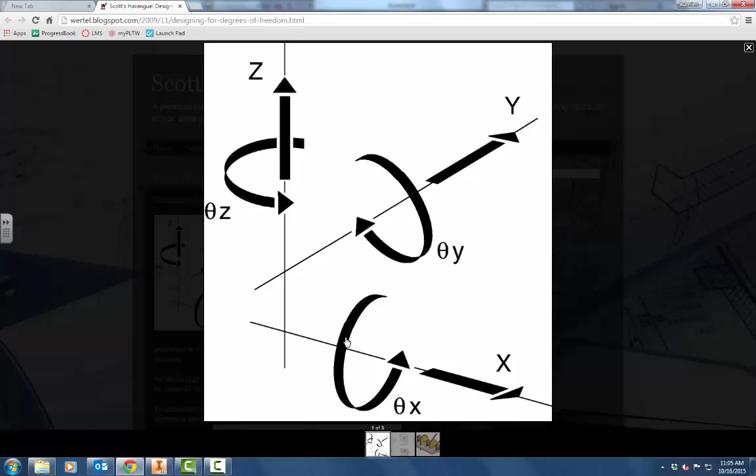Before we start making the assembly, I wanted to mention the concept of degrees of freedom. Every part placed within our graphics window has 6 degrees of freedom, meaning that piece can move along the X, Y, or Z axis, and can also rotate about the X, Y, or Z axis. As we put this together and constrain these pieces, we are trying to remove these degrees of freedom so the pieces will no longer move.

Before we do that, there's one setting I need to make sure you check whether you're on the ThinkPad or on your desktop computer. I'm going to go to Tools, Application Options, and on the Assembly tab, I need to make sure I turn on Place and Ground First Component at Origin. The reason we do that is when I bring my first piece in, I want it to snap to the origin and not move from that point, and that's going to be the reference for constraining all other pieces. Once that's done, I can hit Apply and Close.

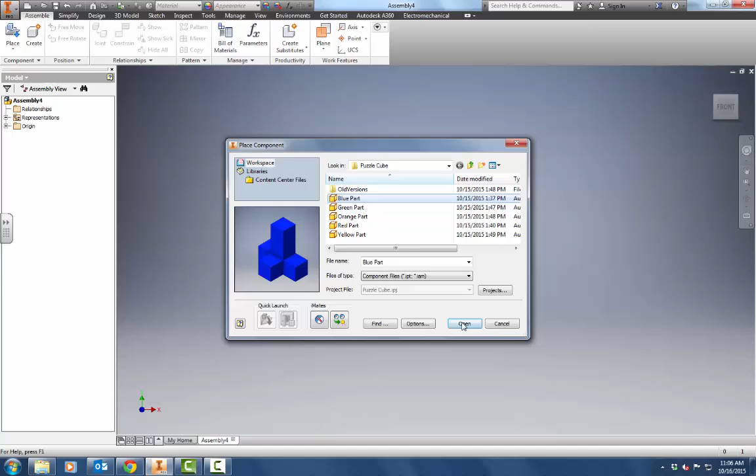I'm going to go to my Assembly tab and click Place as my starting point. I need to pick which piece is going to be my base part. In my case, I'm going to use the blue one and hit Open. It automatically places a copy at the origin, and allows me to place more copies if I want, but I don't need any more. There's only one blue piece in my design, so I'm going to right click and hit OK.

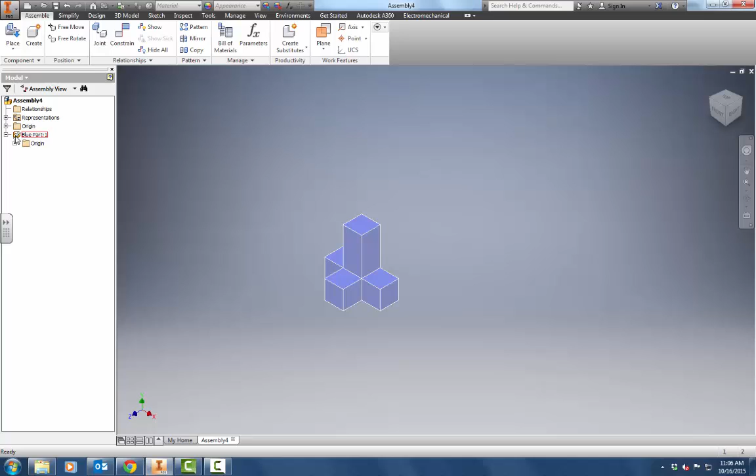Notice that this piece, when I hover over it, there's a little pin that shows up. There's also a little pin on my browser that shows this piece is grounded and will not move.

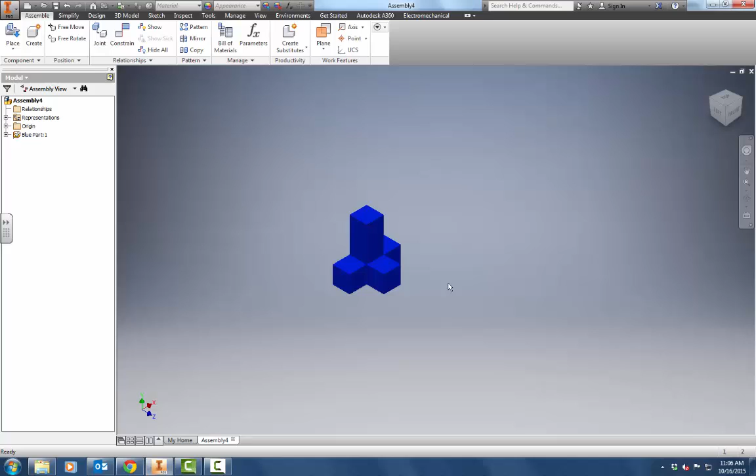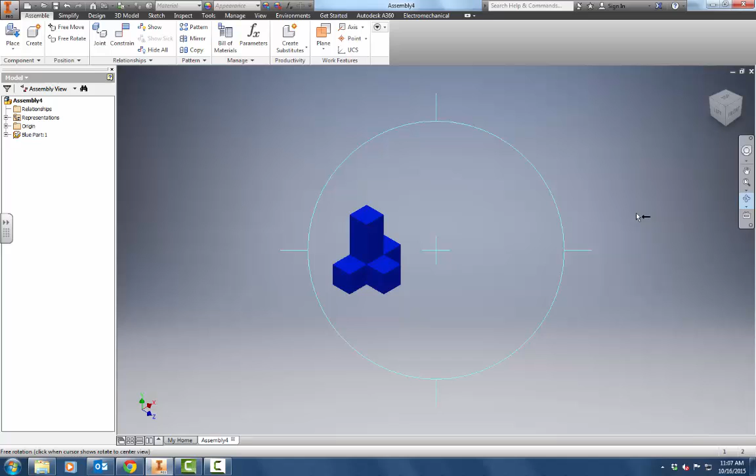The orientation of this piece, however, is not the way I designed it originally. My 4.1b graphic design template looks a little different. In fact, this piece sits more like in this orientation. So I'm going to switch my home view so this is how the home is going to look. To do that, I'm going to right click on the house, set current view as home, and fit to view. That way I can use my template as a reference as I'm putting it together, and I think you'll find that helpful as well. If I rotate this now in any direction, or orbit it, if I hit the home view, it should go back to my new home view for that part.

Next step is to click Place and select the second part. I'm going to bring the red piece in. I'm going to place it on the screen, and again I only need one copy, so I can right click and hit OK. Now this piece would actually have to rotate 180 degrees to fit to where it does with this other blue piece, and I'm going to go ahead and free rotate that to get it close to the orientation of the way it's going to be finally assembled.

So I'm using free rotate rather than free orbit, so I can just spin this one piece around. This is close enough. I know that this is going to fit here. So I'm going to use the constrain function to constrain these together. Now, we talked about removing 6 degrees of freedom. To do that, we're going to have to add 3 constraints.

All of these constraints are going to be the first type, which is a mate. Mate has two solutions. I can mate where two faces touch, or I can mate so that edges are flush with each other.

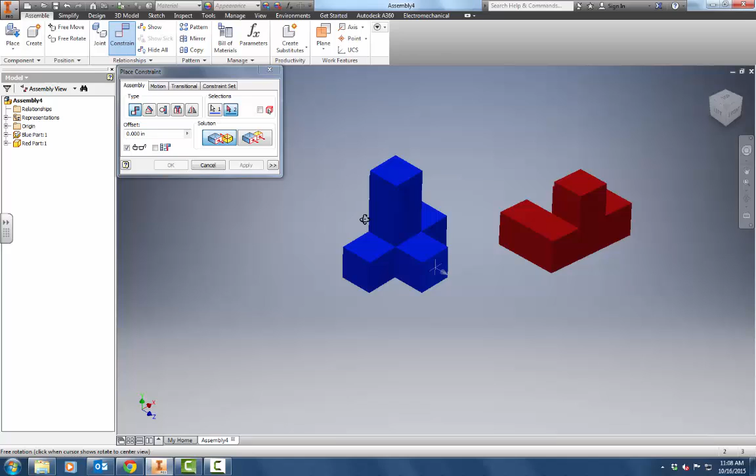For this first one, I'm going to add it so that the faces are actually touching each other. I'm going to select this surface here. If I hold down F4, that's the hotkey to free orbit. Let go of F4, then select this surface here so that these surfaces are touching each other. Once I do that, I hit Apply.

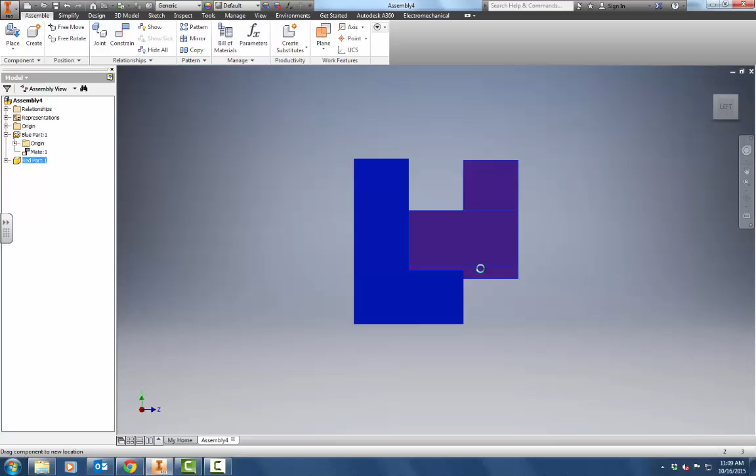I'm going to check to see what that did to my assembly. So I added one mate between those surfaces, but this red one keeps moving, and that's true because we haven't removed all degrees of freedom. But if I turn it to the left, I can see that they are now staying in line with that plane there. So one degree of freedom has been removed from this assembly.

I'm going to use constrain again to add more. This time, instead of mate, I'm going to use flush. The idea is I want to flush this surface with this surface. I hit Apply. Again, if I check...

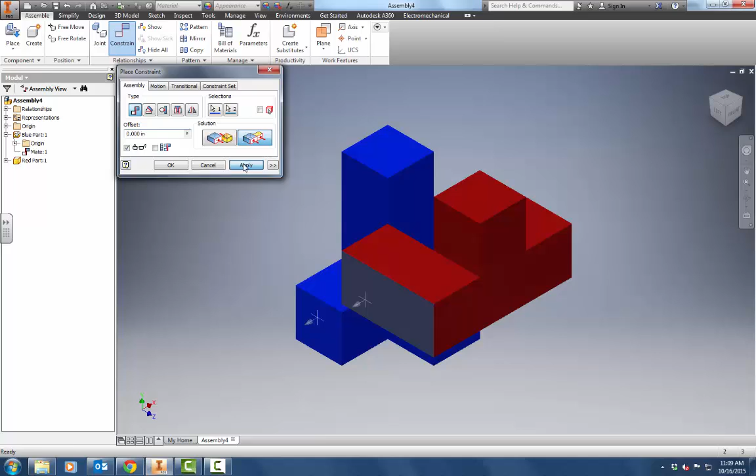This piece can still move. It's not fully constrained. I need one more constraint. We're going to do a mate with a flush solution. Select this surface and this surface, and hit apply.

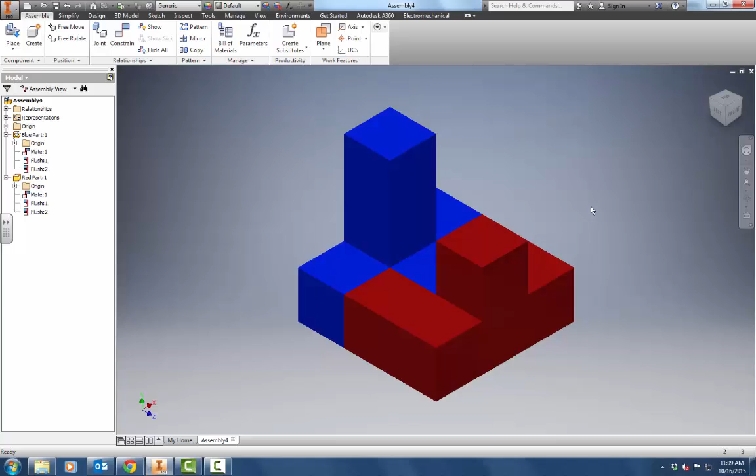So if I look in the browser now, I have three constraints on the blue and red piece. The blue one no longer moves because it's grounded to the origin, and the red one is also now fully constrained and doesn't move. I'm going to repeat this process for the other pieces as well, so I'll do one more as an example before you guys get a turn to try it out.

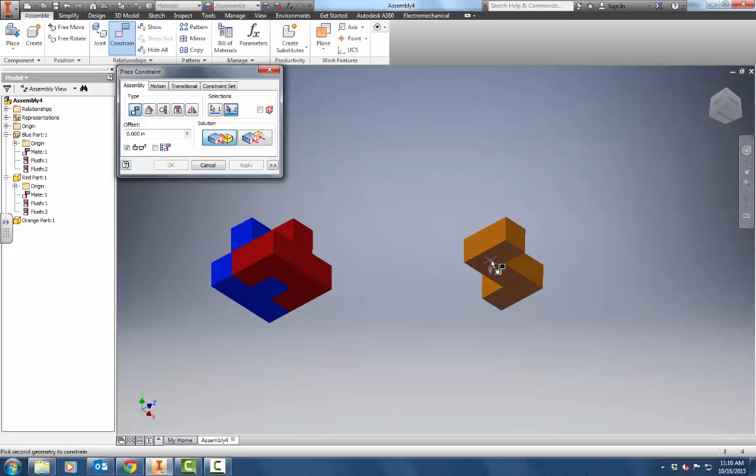I'm going to bring the orange piece in and place it on the drawing. I only need one copy, so I'll hit OK. Use constrain, and I want to constrain the bottom surface of my orange piece, so I'm using the F4 hotkey to find the bottom. I want that face to be touching the top face of my blue piece here.

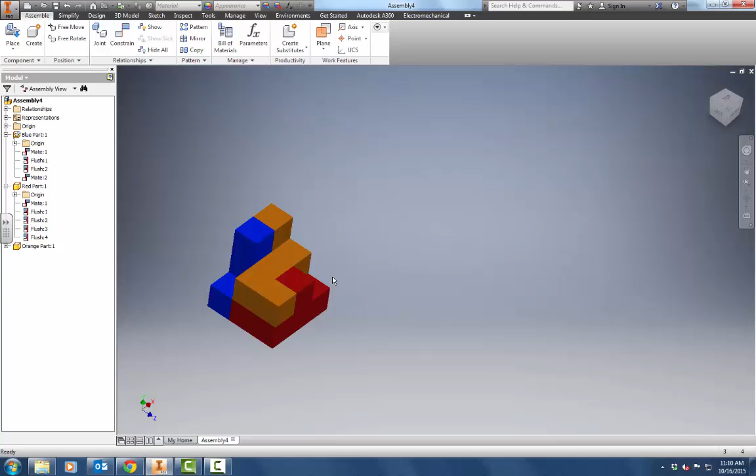Apply. I'm going to flush this edge with this edge, apply, and then flush these edges as well. Now, since these pieces share a lot of faces in common, the surfaces I picked aren't necessarily the only way I could be doing this. I could have used other surfaces to flush this and it would do the same thing.

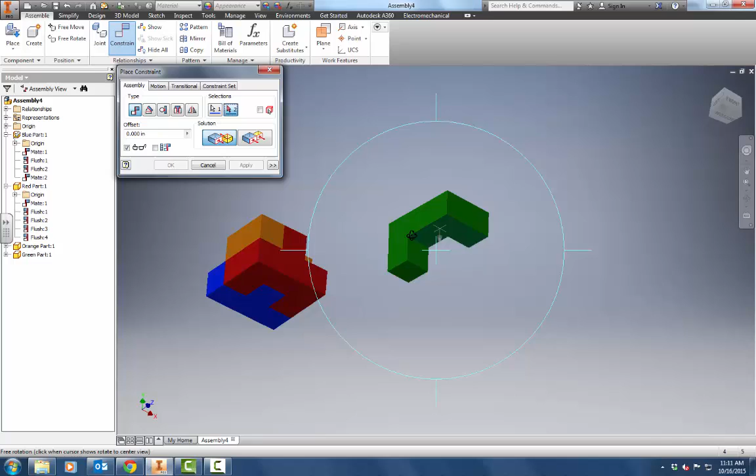Go ahead and bring in the next piece. I'm going to rotate this piece using the free rotate. Use the constrain command. Place a mate between this surface and this surface. Apply. I'm going to flush these edges. Apply. Flush these edges. Apply.

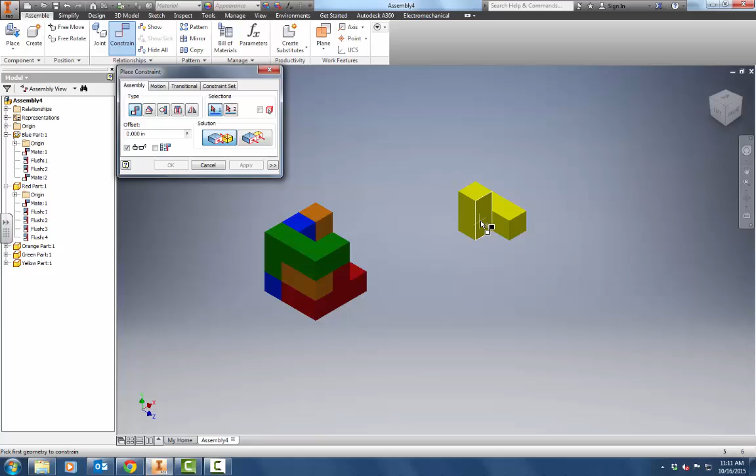Final piece, my yellow piece. Bring that in. This one I'm actually not going to rotate in position. If you select the proper surfaces for your constraints, it'll rotate it the way it needs to go. So I'm going to have this face mate with the top of the orange here. Hit apply. Although it looks incorrect, as soon as I add a couple more constraints, it's going to work out just fine.

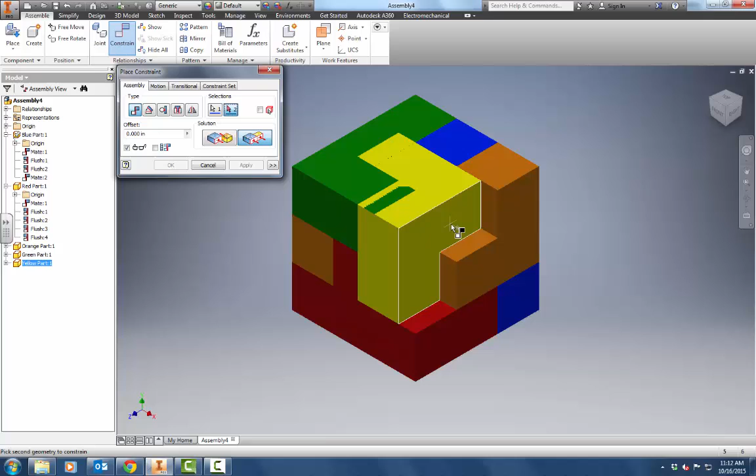So now what I want to do is flush this face with this one. Apply. See how I rotated it? I have one more constraint that I need to add. I'll also do a flush for that one, to flush this face to this face, and apply.

So now all my pieces are fully constrained. None of them will move, which is what we want. And I'm going to save this. This is an assembly file, and I will call this puzzle cube, and we will use this puzzle cube to build our exploded view next.